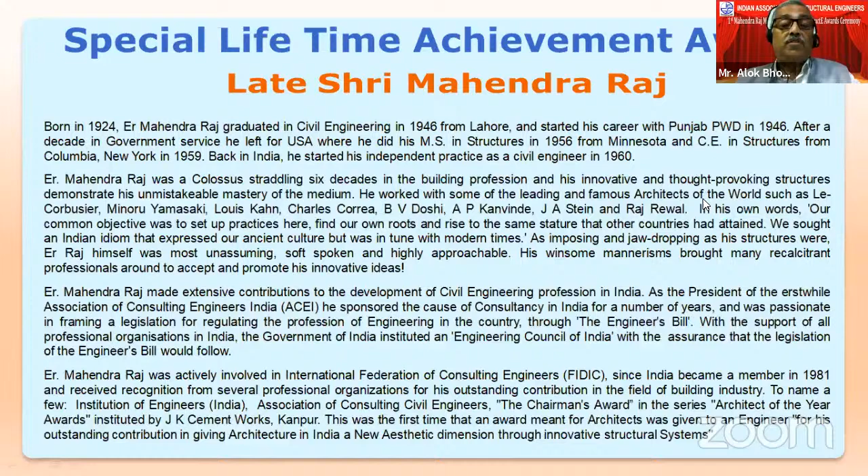May I now request our president to give this citation to late Mr. Mahendra Raj. On behalf of Mr. Mahendra Raj, Mr. Rohit Raj will be accepting it. May I request the president to kindly do the honors.

It is my honor to present this Lifetime Achievement Award to legendary structural engineer Mr. Mahendra Raj. I am sure his rich legacy will continue to inspire the entire structural engineering fraternity. I request Rohit Raj to kindly accept this award.

Thank you, Mr. Mittal. Thank you, Professor Tandon, Mr. Alok Bhowmick, for honoring my father. This was always his - you are absolutely correct in saying this was his child - and all the associations he mentored and grew with as he took a back step professionally, he engaged more and more in all the associations, and his heart was absolutely linked to each and every engineering association that he worked for. We are privileged to be here, for you all to have invited us. I can see my sisters there, my brothers there, my brother-in-laws there. Thank you so much for including us in this ceremony.

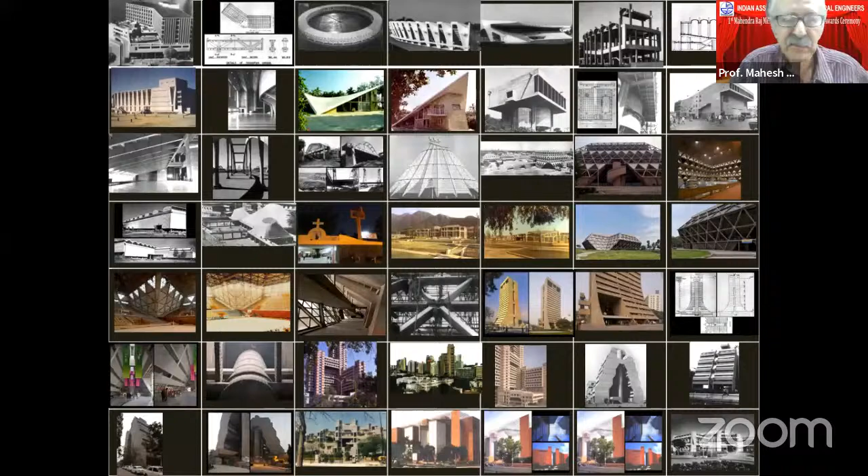About tall buildings, the Council for Tall Buildings and Urban Habitat have a classification based on height: 50 meters means tall, 300 meters means super tall, and 600 meters means mega tall. In 1890, buildings over 10 stories were considered tall, with no further classifications. An Indian code, IS 16700, was published in 2017 on concrete tall buildings, covering a range between 50 to 250 meters.

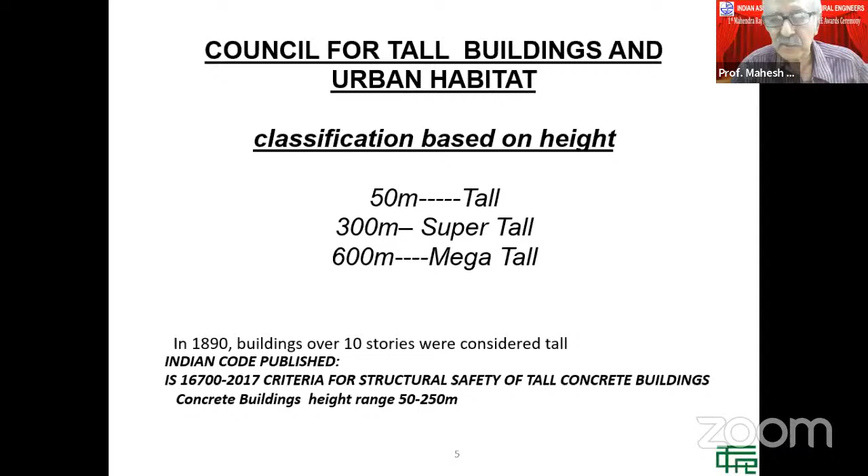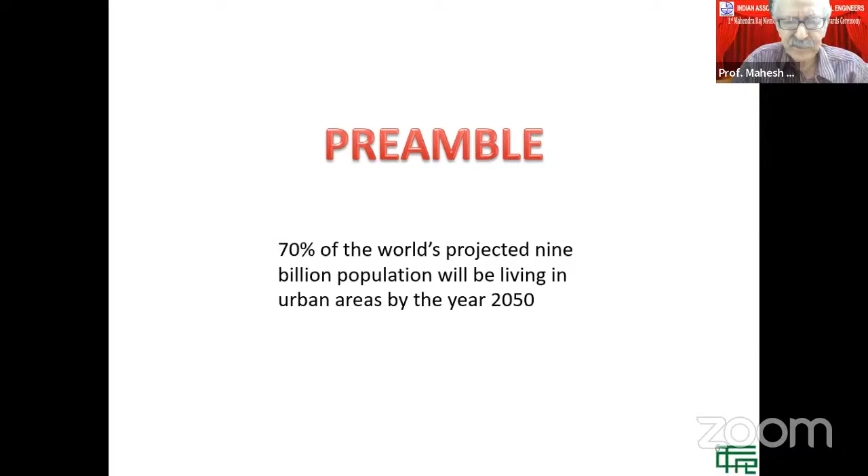70% of the world's projected 9 billion population will be living in urban areas by the year 2050. So we really have no alternative but to go in for tall structures which can house a lot of population. I will, of course, show you what the latest thinking is on the subject, but let's go further.

There are certain milestones in tall buildings which we must recognize. The first was the inventor of the elevator, Elisha Otis, 1850. The architects and structural engineers need to be recognized for the first major tall buildings, that is the Empire State Building, which held the world record for 40 odd years. You have the names of the architects and structural engineers on the left hand side. Then in 1957, the architect Frank Lloyd Wright was the first to think of a mile-high building. The structural engineer who in 1970 developed structural systems suited to very tall buildings was Fazlur Khan, and he was in the company called Skidmore, Owings and Merrill. But we know this company basically because of Fazlur Khan's contributions.

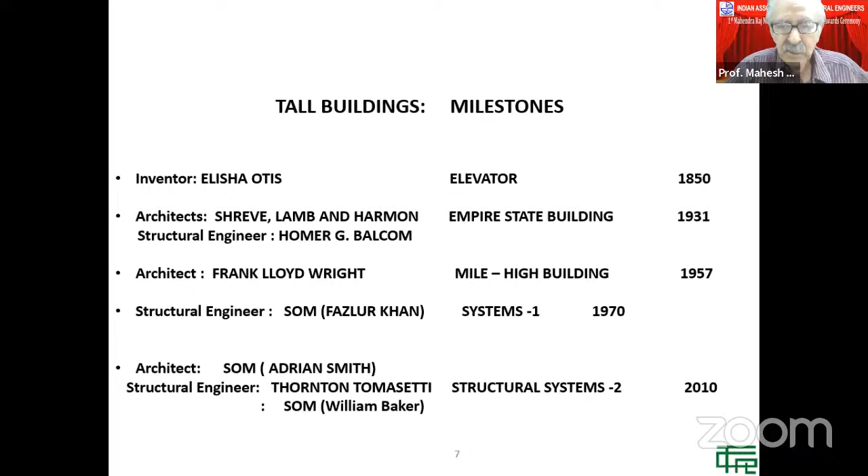Elisha Otis, here he is demonstrating at the New York World's Fair in 1854 that a steam-powered roped elevator with toothed guide rails can go up and down, equipped with a safety device to prevent it from falling, because people always thought in those days that perhaps it's all right to go up and down, but is it safe? So he demonstrated it at the New York World's Fair, which you see here, a picture taken maybe more than 100 years ago. He demonstrated that it is safe, and this was the start of the tall building revolution in the world, because without these types of equipment, you could not build tall buildings.

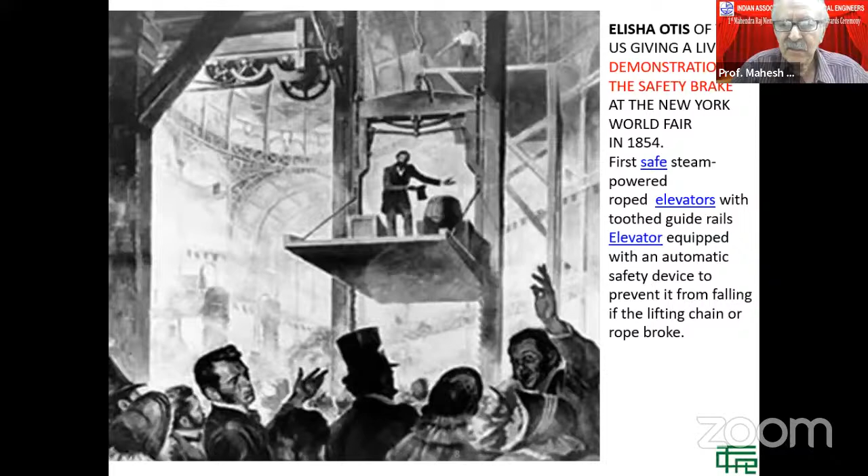The Empire State Building is always a pleasure to talk about, because it had 102 stories and was built in a little over a year. The speed of construction was 4.5 floors per week. This was done in 1930, and I think even now it may be difficult to equal this type of speed of construction.

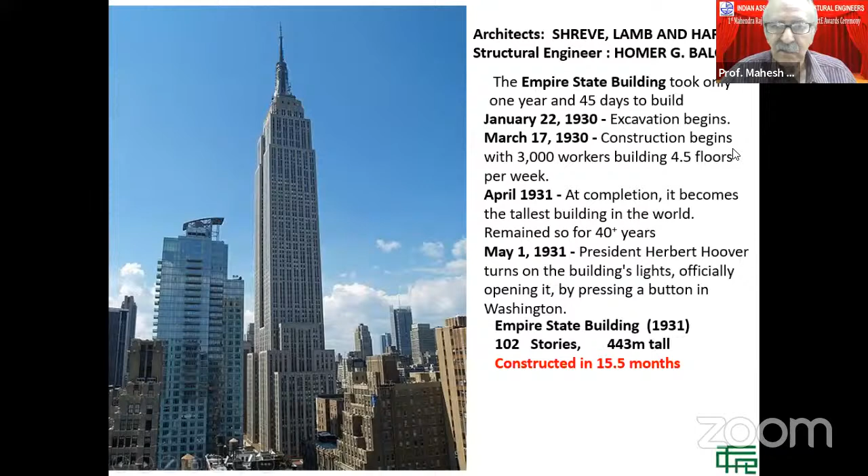Even in those days, in 1931, the president of USA, Herbert Hoover, officially turned on the building's lights, opening it by pressing a button in Washington. So it's not only these days, but even in those days, people had ideas as to how to do it.

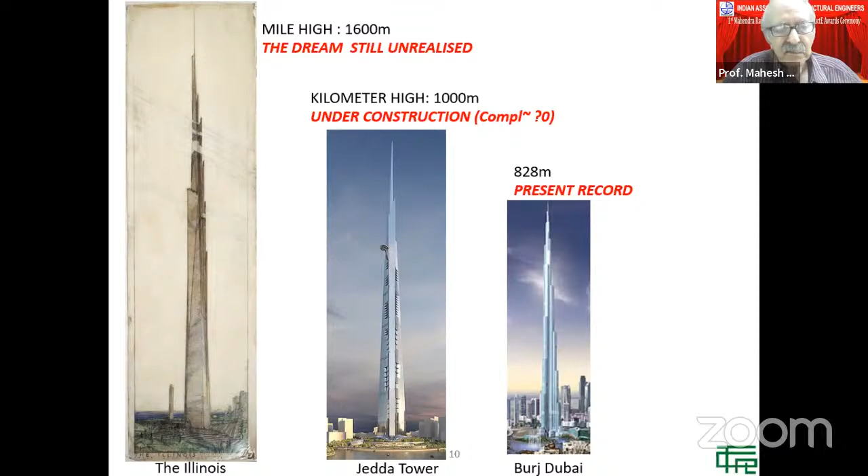One of the things he mentioned, which is truly very touching, he said there is no true understanding of any art without some knowledge of its philosophy. If you read his book, A Testament, published in 1957, you can get all the details of this building and many more of Frank Lloyd Wright. He is considered to be the greatest architect USA has ever produced.

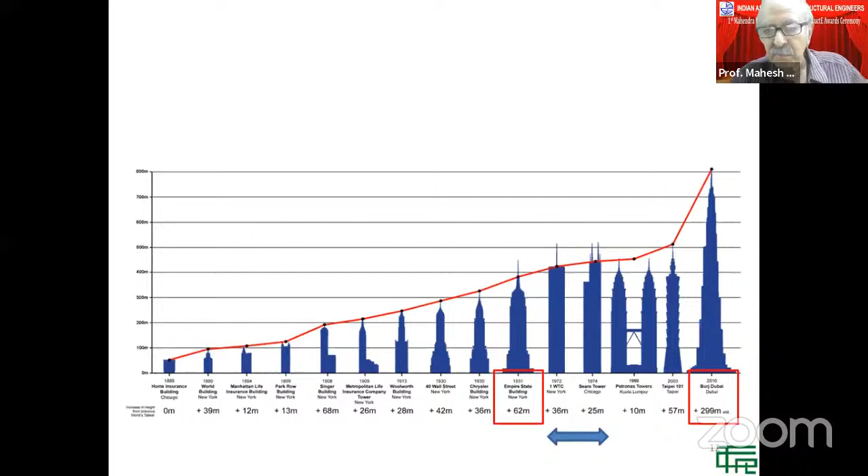As things stand today, you can see on the right-hand side the Burj Dubai, where it has reached. At the bottom, you can see the additional height added each time a building is made: 36 meters, 25 meters, 10 meters, 57 meters, and finally 299 meters from the earlier record, which is actually the Taipei 101. Fascinating building, but you can see the way the height has grown.

Part of the secret of Burj Dubai lies in the fact that it has a concrete base up to a certain height, and then the upper part is made in structural steel frame. This last part was what enabled the building to be so high.

If you look at some of the statistics, it is founded on a 3.7 meter thick raft supported on bored piles 1.5 meters in diameter, extending approximately 50 meters below the base of the raft. So if you see the foundation itself, it gives you an idea of what was involved.

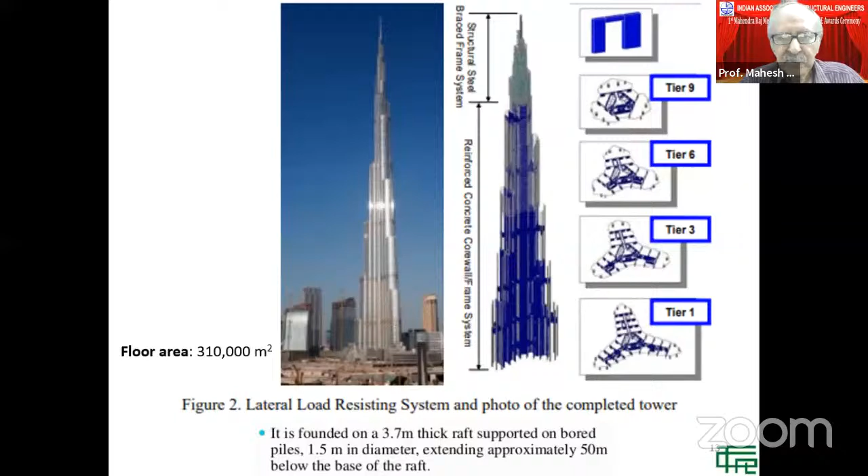This is the Kingdom Tower, supposed to be higher than 1 kilometer. On the left-hand side, you can see the structural framework that was adopted, with long shear walls and cross walls, because the long shear walls would not be stable without them. This is basically the structural concept made for the Kingdom Tower, very similar to the one adopted for the Burj Dubai.

On the right hand side, you can see the wind tunnel test, because all tall buildings, once they reach a certain height, it is better to do wind tunnel testing as shown here. Here you can see a turntable, so although the wind tunnel blows wind only from one direction, you can rotate the building to find out the effects from various directions.

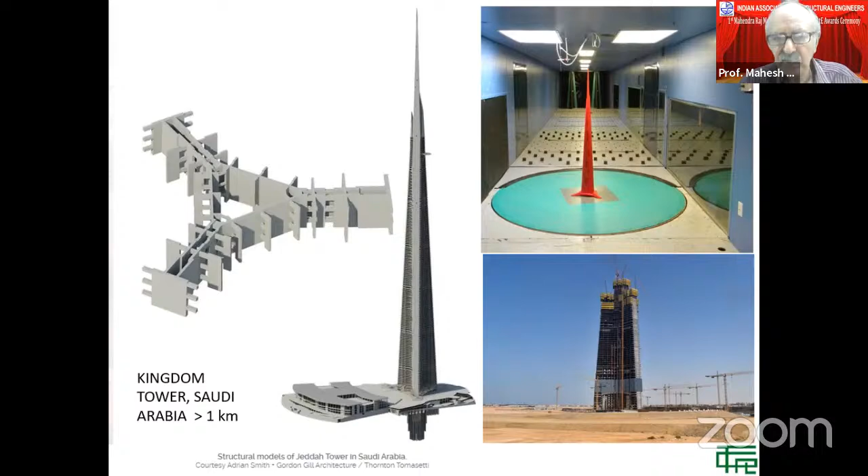The last photograph on this slide shows where it has stopped at the moment. I think it is something like 600 meters, but I'm not sure of the exact height.

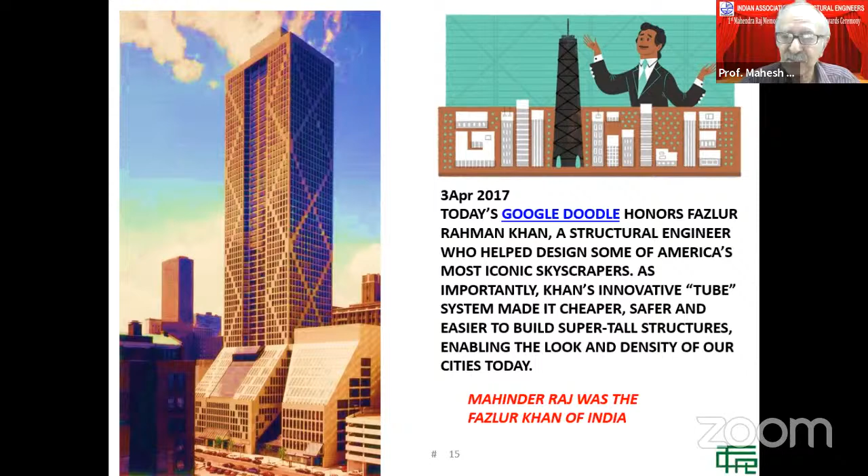Let's talk about Fazlur Khan. On 3rd April 2017, there was a Google Doodle which honors Fazlur Khan, a structural engineer who helped design some of America's most iconic skyscrapers. As importantly, Khan's innovative tube system made it cheaper, safer, and easier to build super tall structures, enabling the look and density of our cities today. I think the closest in our country who comes to Fazlur Khan is Mahendra Raj. He was really the Fazlur Khan of India, but his creations were not limited to just tall buildings, but any kind of structure.

Fazlur Khan ushered in a renaissance in skyscraper construction during the second half of the 20th century by introducing the tube concept of structure. Here you can see the structure is actually outside the building, on the outside facade. Nobody before him had really thought that the structure could be put outside on the facade. Here you can see both concrete and steel applications where the structure is on the outer facade.

Fazlur Khan developed many structural systems for both steel and concrete, and you can see some of them here. This is Skidmore, Owings and Merrill. I think the tradition set by Fazlur Khan is still continuing, and they are still designing the tall buildings of today. Some of the things which we take for granted is the behavior of frames and shear walls. So it is a simple concept but extraordinary.

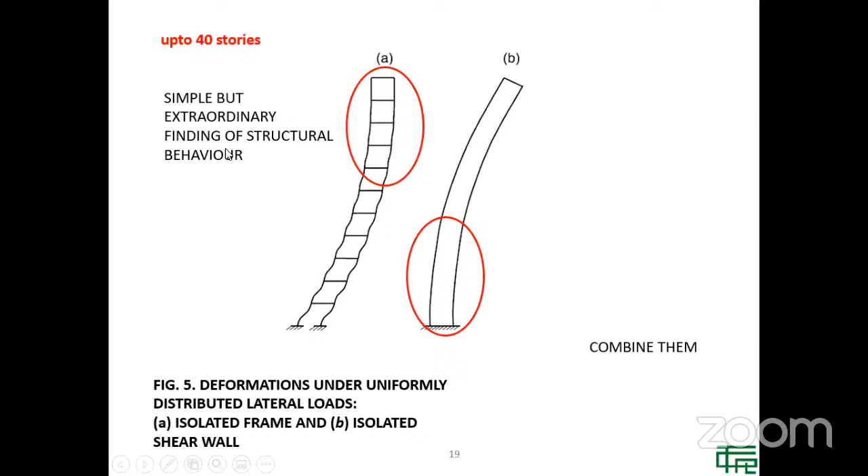I think we have lost Professor Tandon's voice. Maybe his signal is weak. Tandon Saab, we are not able to hear you. I think we may have to wait for a couple of minutes for him to come back. Apologies for this goof up, I think it's not in our hands. Maybe Vikas can call him. Yes, I'm calling you.

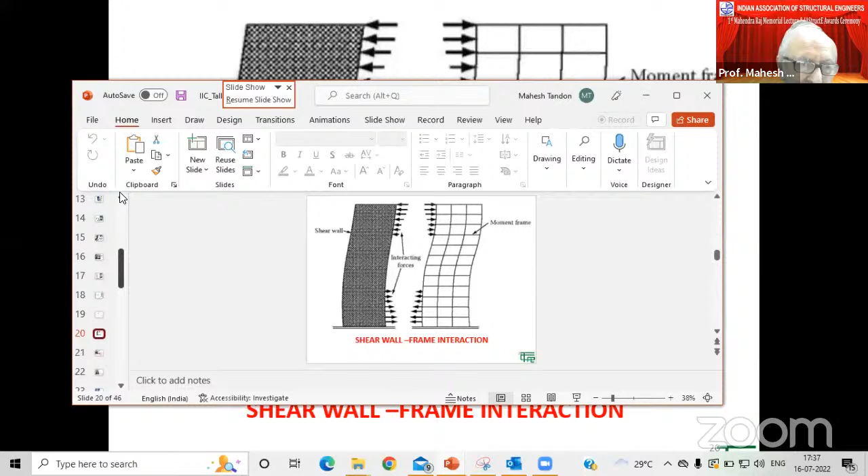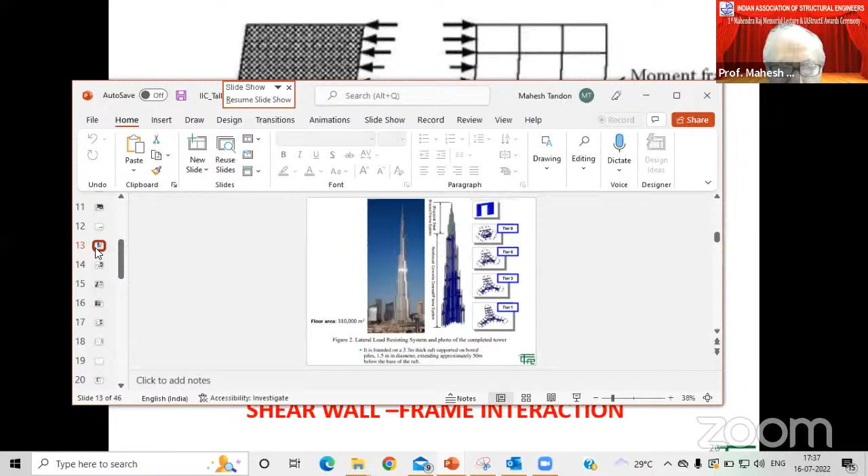Yes, it has come. Just put it in presentation mode. Yeah, one must go to the slide. I don't want to repeat what you have already seen. Sir, he has to go near the 9th or 10th slide, please tell him. Ninth or 10th would be somewhere here. Are you sure? Yes. You can please come to 13th, sir. I think we have gone through this. Shear wall frame interaction, this you have seen? Maybe 15, the one before. Okay, I think you can start from here, maybe a bit of overlap, but you can start from here.

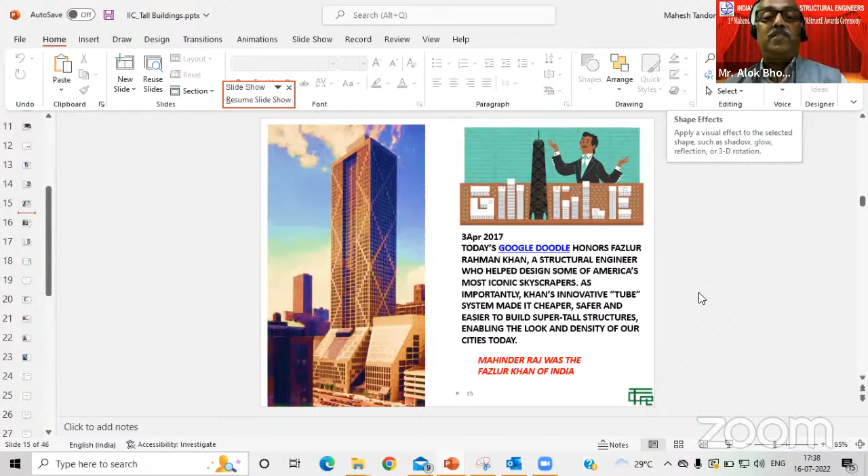This is now not in presentation mode. Oh, we got something else now. Okay, I think we were here.

Fazlur Khan was the first person who thought of putting the structure outside on the facade of the building, as you can see here, instead of putting it inside and cluttering up the whole area with columns.

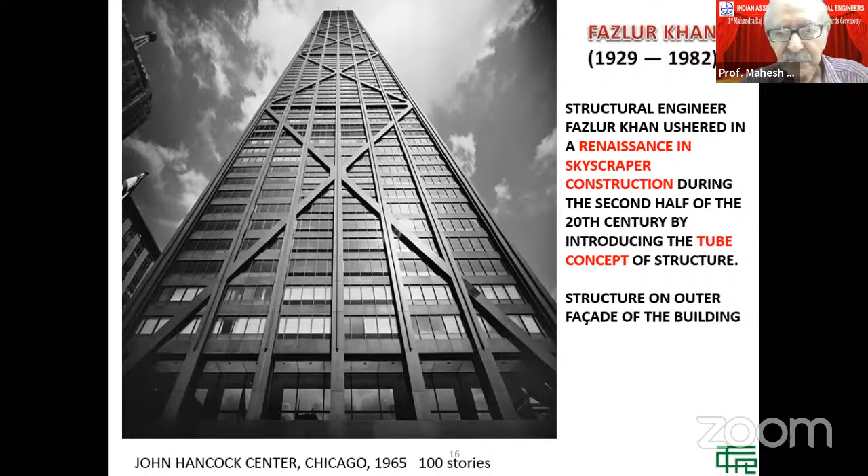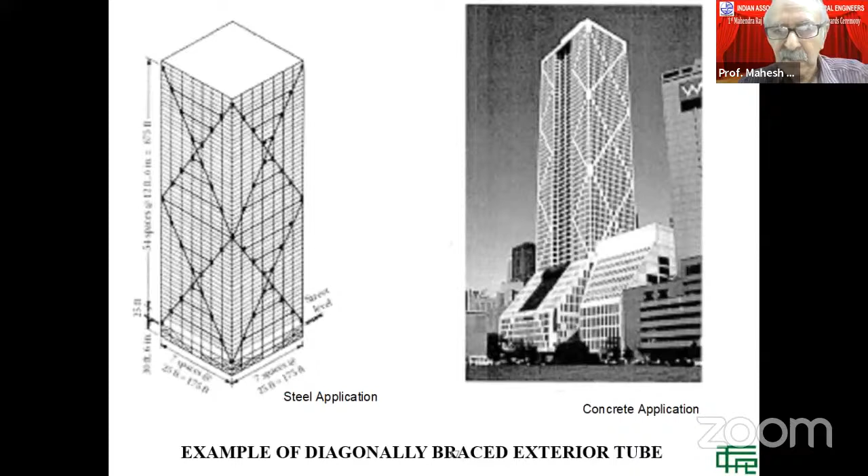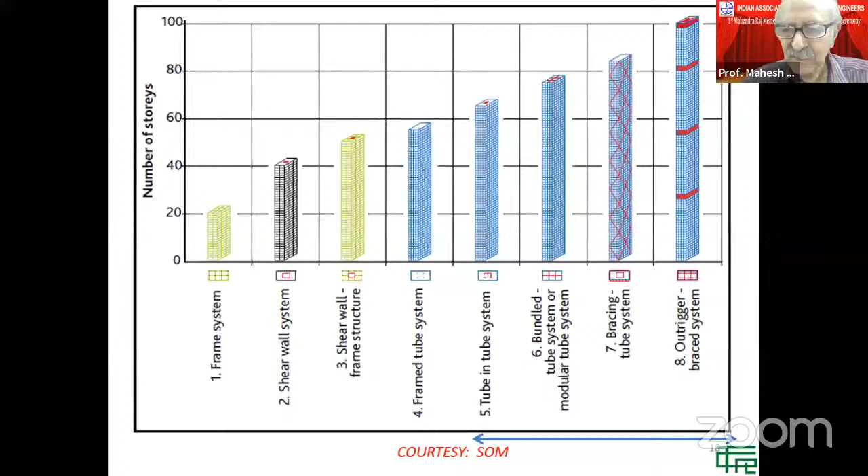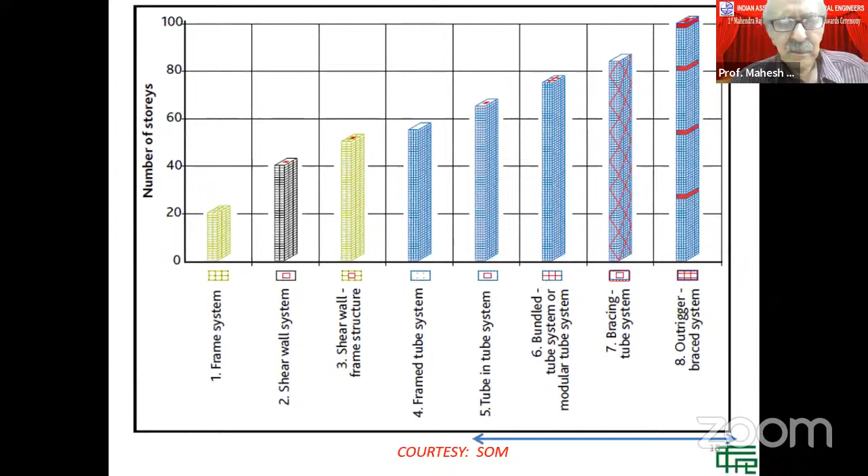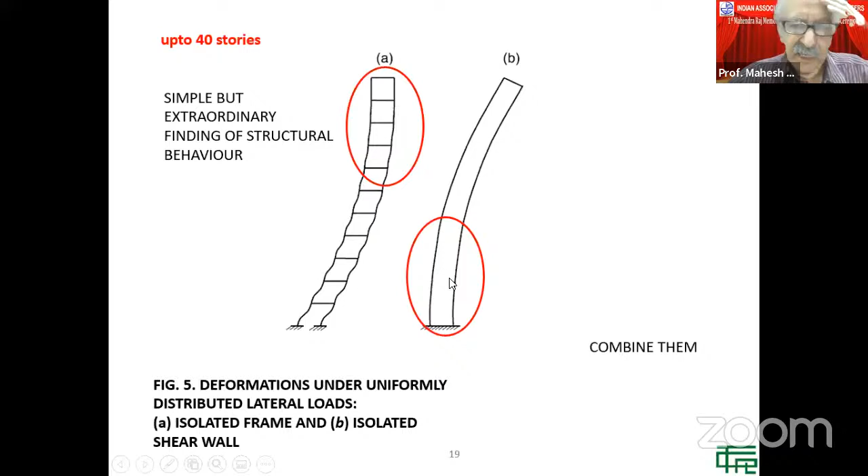If you have a frame by itself, it behaves like what is shown in diagram A. If you have only a shear wall, it behaves as shown in B. So what Fazlur Khan decided to do was join the two together, so that at the top it would be a coming together of the two types of structure - shear wall and frame - and at the bottom again it would come together. This is what it looked like, his conception.

And today we take it for granted that everybody knows about shear wall frame interaction, but let us pay homage to the person who first thought of it.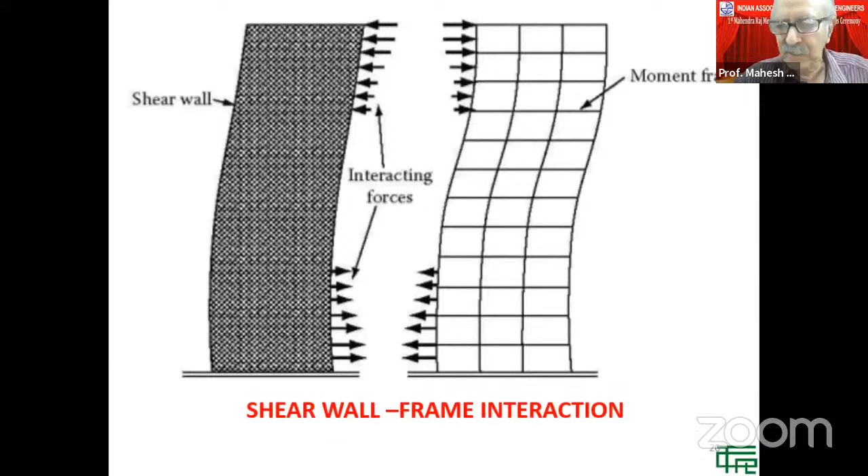One of his earliest buildings in concrete was where he put an 8-meter deep transfer beam right at the bottom. But this is not the only thing that works as a structure. He has got this outer framework which acts as a structure on the outer periphery, and he also has a tube in the center, or rather the core of the building, that also. So there is a core which is the shear wall, as well as the frame which is on the outer surface, and they work together.

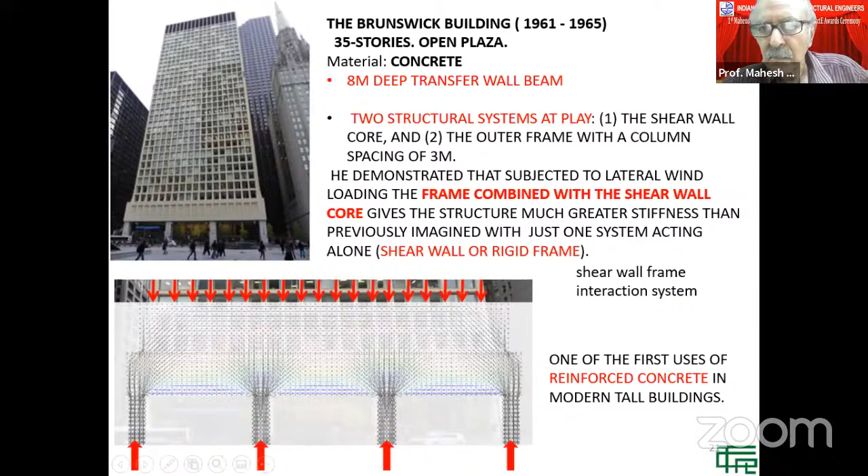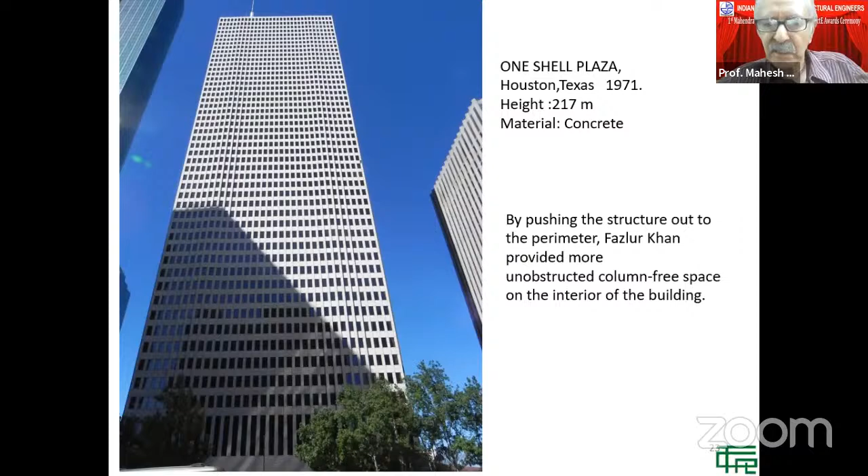Here you can see another building, one of his earlier buildings in concrete, 217 meters high. And what was the great thing about putting the structure outside?

Can you see the slide? Hello? Yes, we can, we can, Professor Tandon. Okay, and you can hear me?

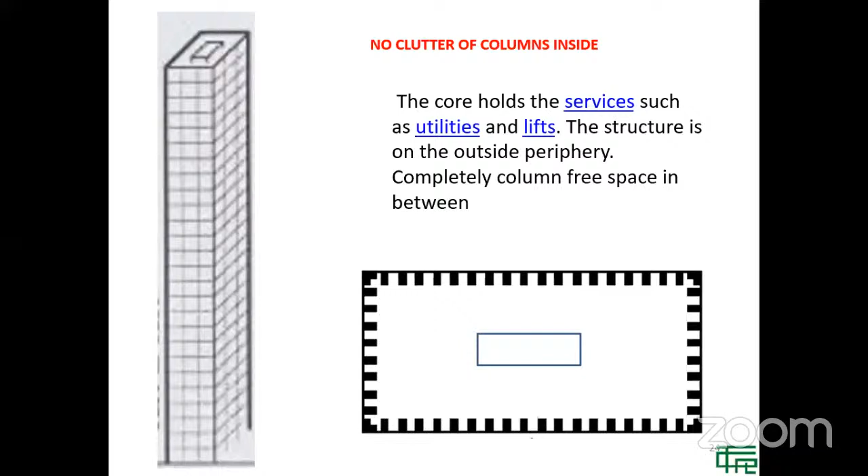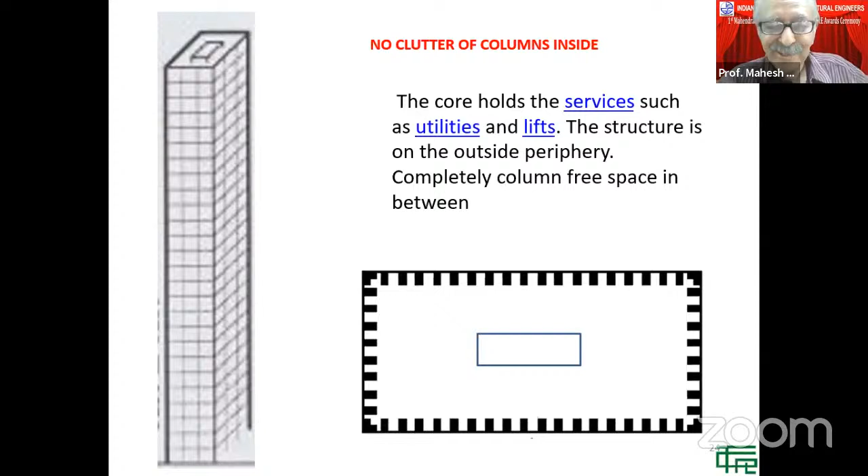Yes, of course. Okay, so here you can see just a rectangular building wherein the central part there is the utilities which go up, and the lifts. That space is occupied by these items, but there is no column anywhere. Columns, or rather the whole structure, is located only on the outer periphery of the building. So you could have column-free space, which the architects are so fond of - they keep talking about how they don't like columns at all. So I think this was made for architects, basically.

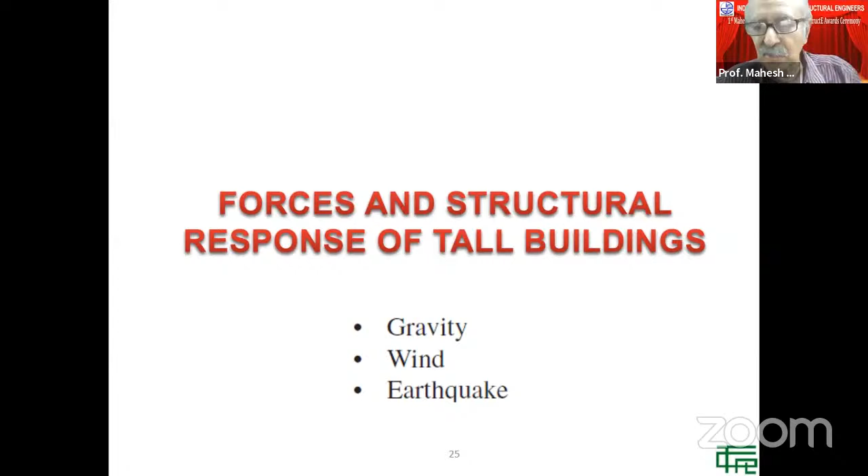Now, just talking about tall buildings, we have to talk about not only the gravity load, but wind and earthquake. So we'll discuss a little bit about that.

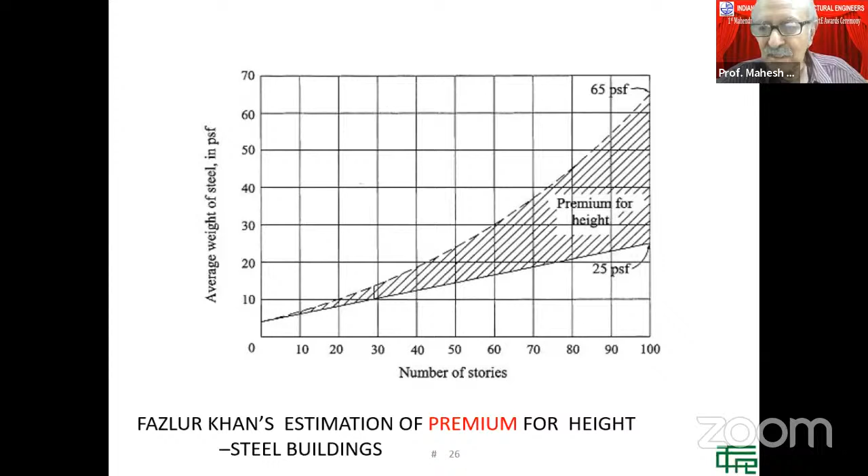For tall buildings, you can have 25 pounds per square feet if there was no wind or earthquake, and you can also have 65 pounds per square feet, which is 2.5 times that, if you have wind and earthquake also to be taken into account. So we must understand why the structures of tall buildings are always more expensive - because you are paying a premium for height.

The main issues of tall buildings are: one is the structural strength and stiffness for lateral forces, and evacuation - how do people evacuate from the building? I think after the World Trade Center towers, everybody is worried about evacuation.

There is also the question of vertical transportation, the origin of which was done by Mr. Otis, that you have lifts going up and down. Vertical distribution of utilities is another thing - how do you send water, how do you do drainage, and so many other things.

Vertical building movement is the other problem. If you have such a tall building and such a big height, the building actually shortens because of elastic deformations.

Another problem is during construction, setting out and verticality. The building actually sways even during construction, and how to keep the setting out and the verticality in position is another issue which tall buildings have.

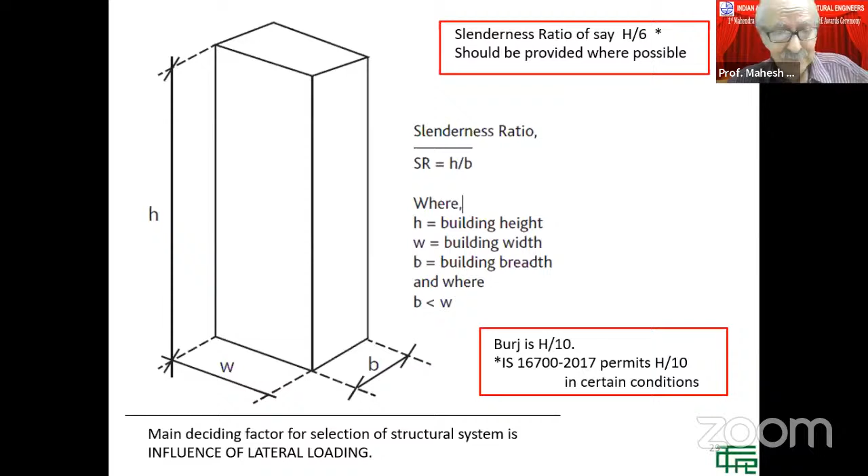The deflection at the top, h by 500, that is the limit. Interstory drift for wind and earthquake is different. For wind it is h by 500, and for earthquake it is h by 250. This is the drift between two consecutive floors. How to find that out is also there, because all these play an important role in the comfort level of the people staying there.

So you can see peak combined acceleration is the other major issue. For residential buildings, it is more stringent as compared to office buildings.

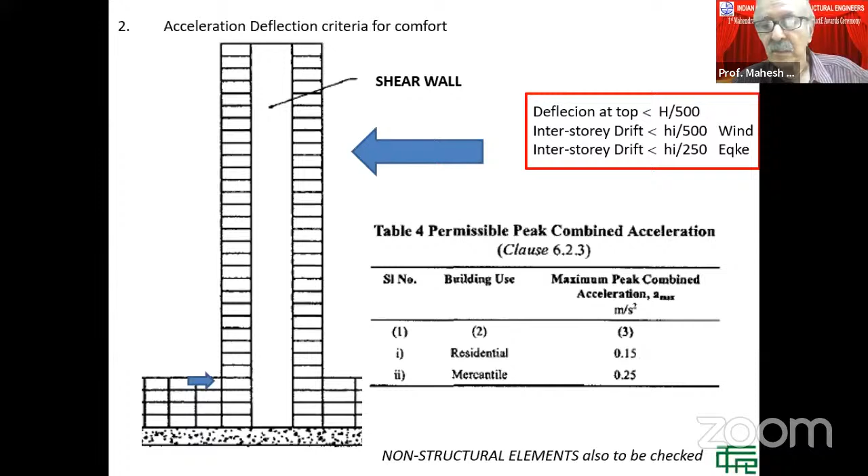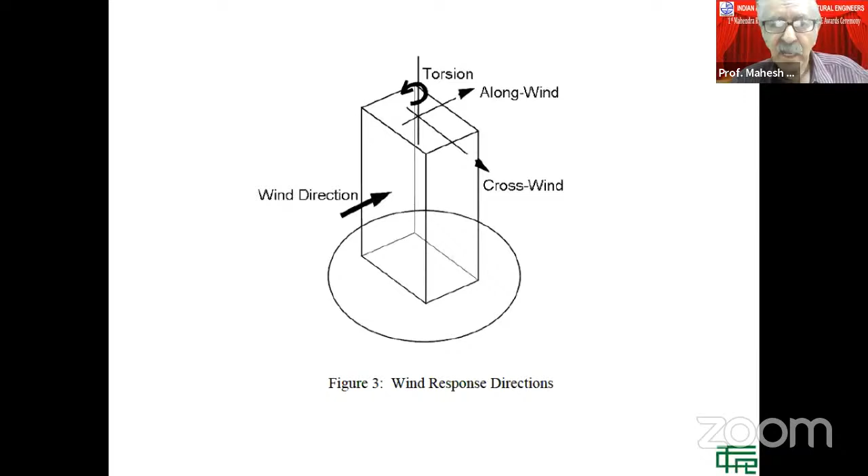Now, if you see, the wind comes from one direction, but there can be three effects on the building itself, the response. You can have an along-wind response, you can have a crosswind, and you can have a torsion. So all these have to be taken into account.

Another issue is the terrain category. Like, for example, if you are in urban areas, you already have a number of buildings, so there the wind action is different. This Vg is the gradient height above which the wind becomes more or less constant speed. As you keep going down, the wind speed also comes down depending on the terrain category.

So that is why you have to model, perhaps in the wind tunnel, which is the best solution till today, to find out how the behavior is, because these buildings which are already existing, they also have to be modeled to find out the effect of the new building which you are going to construct.

The other thing is about interference effects. If you have two buildings which are more or less similar, the effect can be quite drastic, one on the other. So that also is something the wind tunnel will tell you, rather than there are other ways of finding out, like CFD, computational fluid dynamics. People are doing all that in computers, but at the moment, I think the most reliable thing is to go for a wind tunnel.

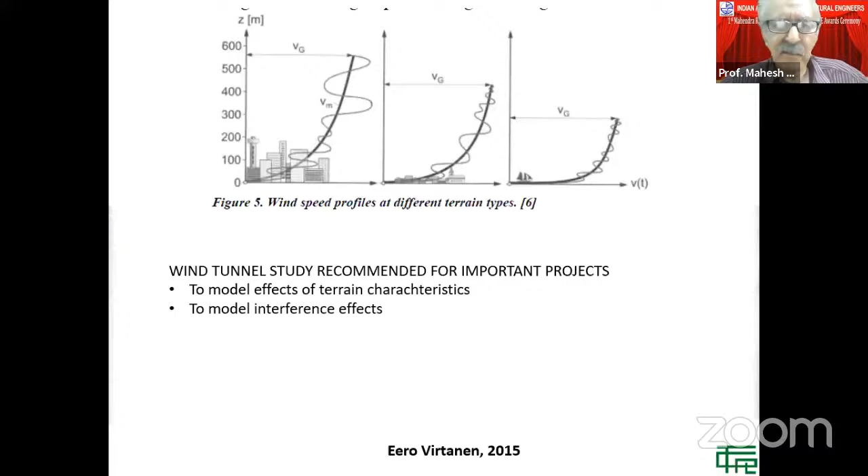Here's a wind tunnel, the National Wind Tunnel Facility at IIT Kanpur, which we had the pleasure and privilege to design for them. You can see that it is a closed circuit wind tunnel, and you can also see the turntable, so that you can rotate the building itself, because the wind will come only from one direction in the wind tunnel. So you can find out the effects.

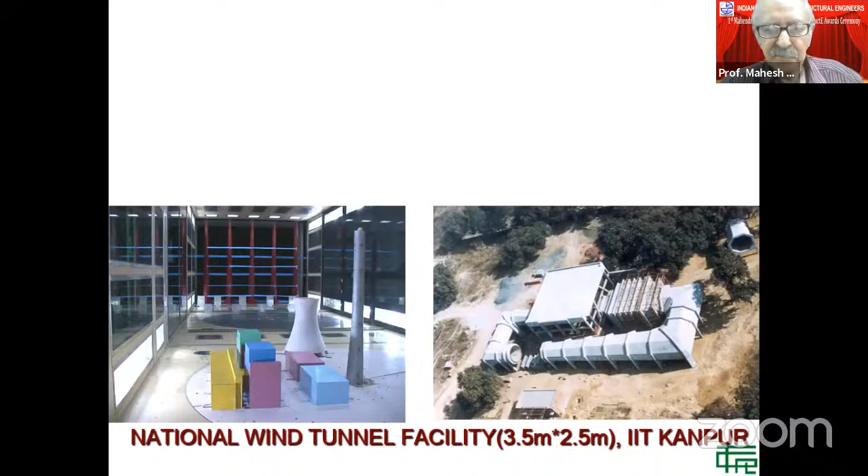Now, talking about earthquakes, what is dangerous is the resonance of the building and whatever is below, the soil or rock. If you have hard soil or rock, the dominant period of the earth is about 0.5 seconds. But if you have a soft sediment like we normally have, then it is 2.5 seconds. So if you don't want the building to resonate with the ground, you should stay away from these frequencies.

As a matter of fact, people often think that tall buildings are more dangerous than short buildings in an earthquake. That is not correct. If you design it properly, the tall buildings are actually safer.

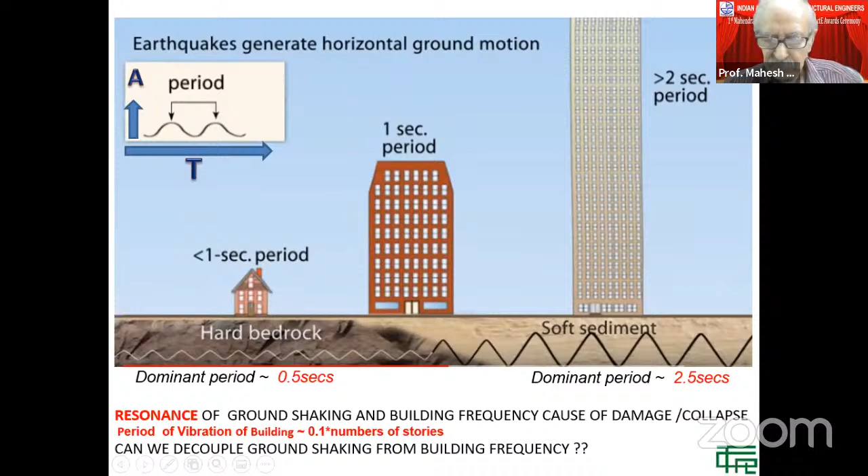Okay, this doesn't work.

Of course, there are other ways in which the effects can be reduced, either by base isolation or by...

Just one second. Anyway...

If you have a base isolated building, that is the other way in which you can reduce these effects which are due to wind and earthquake. I wish I could show you a building which is shaking, but I think we'll have to miss that.

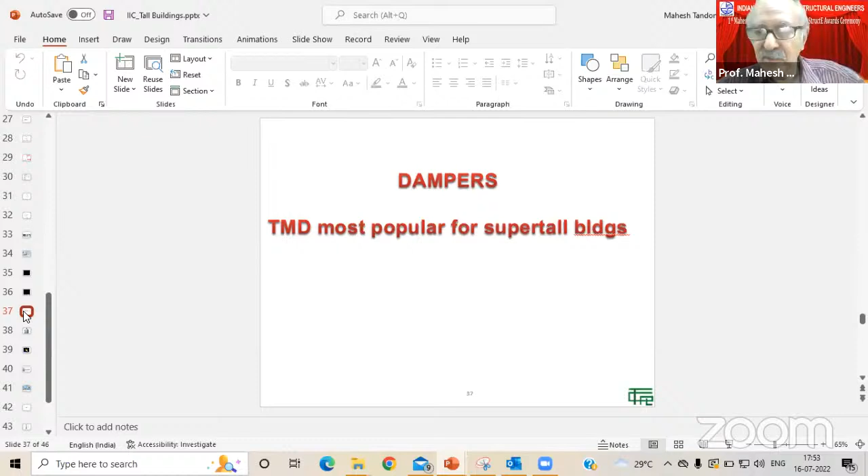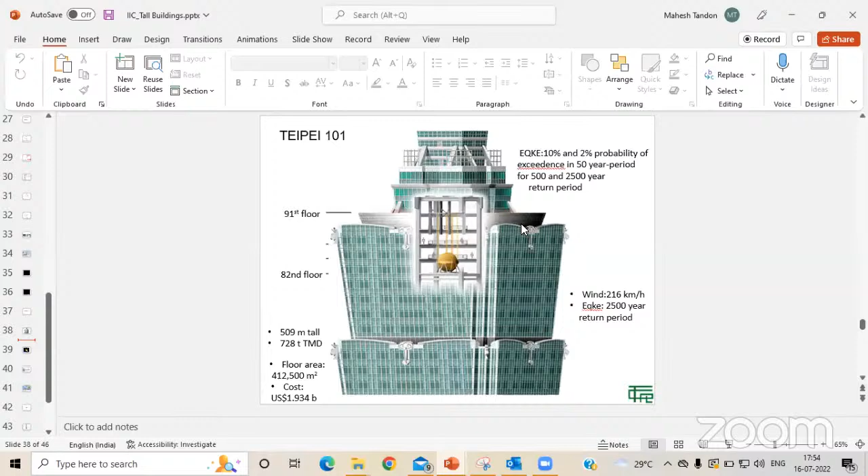And there's another thing which is dampers. Dampers means that if you see this Taipei 101, which held the world record before Burj Dubai, there is this big yellow 700-ton steel ball at the top. Tanan, I would like to go back to the slideshow. Thank you.

So this steel ball that you see, it is hung from the top, and it moves in the opposite direction to which the building is moving. So it is actually damping the vibrations which may be due to earthquake or wind. And it has already, as you can see here, withstood the design wind speed, and the earthquake, which you can see on the right hand side.

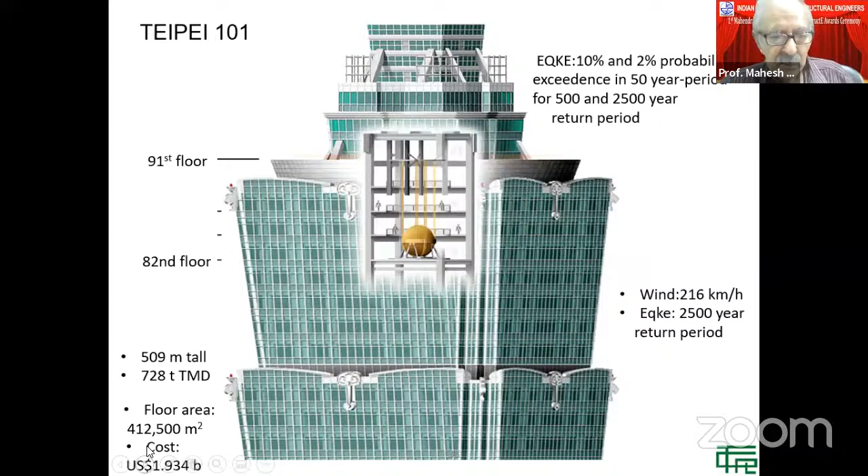So let us go and see whether this thing works. The blue line is the building, and this yellow ball that you see is the steel ball of 700 tons, which is moving opposite to the direction in which the building is vibrating. So this is how we are able to reduce the effects of both earthquake and wind due to this.

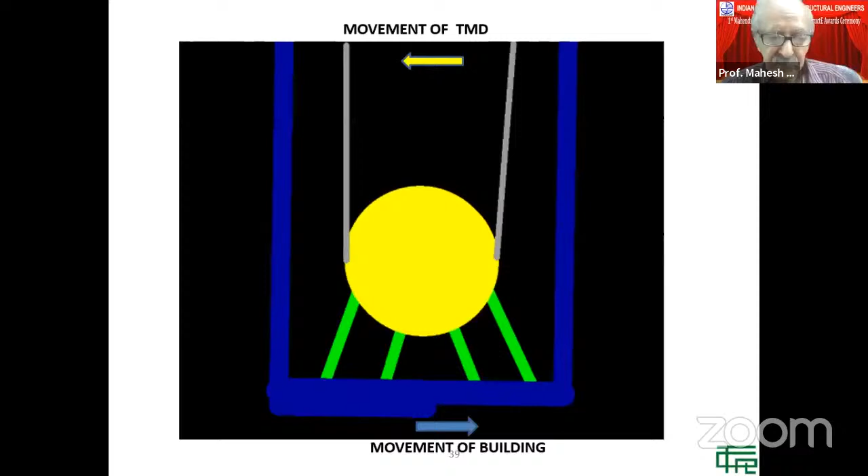Now I wanted to talk about the Kingdom Tower, which is supposed to be greater than 1 kilometer high. At least it was supposed to be. So what are the main issues?

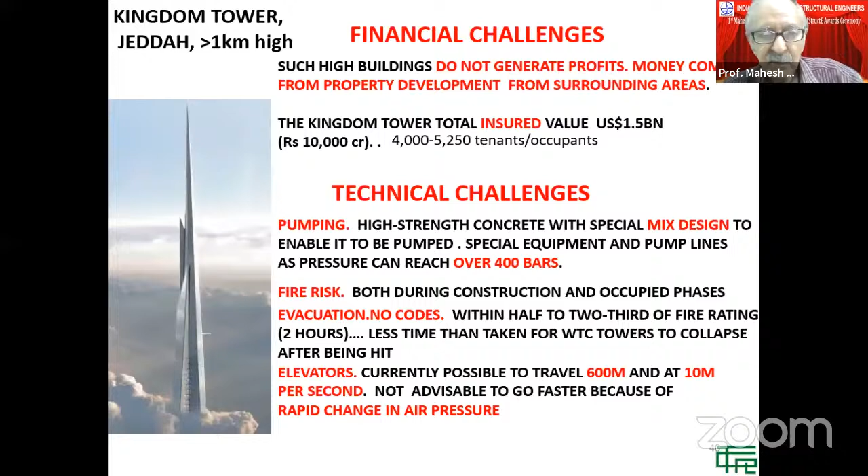Now, coming towards the end of this, there is an American architect, Eugene Tsui, Chinese American. He thought of the Ultima Tower, which is 2 miles high. And if you can see the shape of the building, and compare it with Burj Dubai here, you can imagine how tall this is. And according to this architect, you can house the whole San Francisco city in this tower. Of course, the cost will be about 3 billion dollars. But this is the new thinking that is coming, that you can have taller and taller and taller buildings.

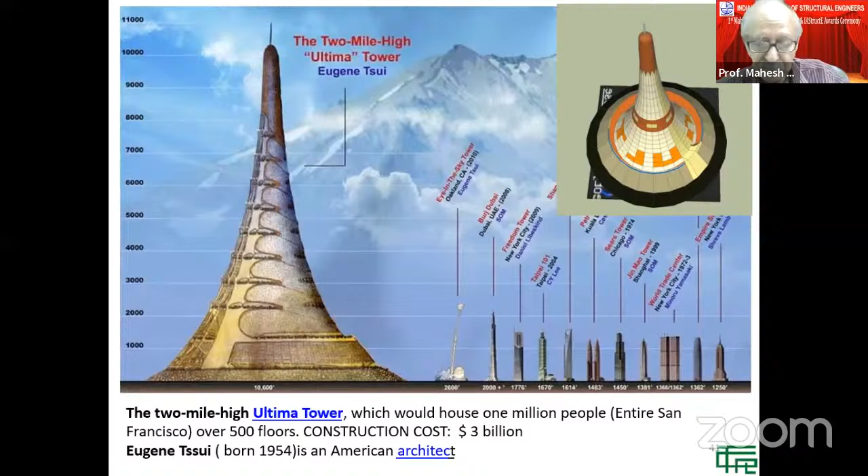Okay, thank you very much for your kind attention.

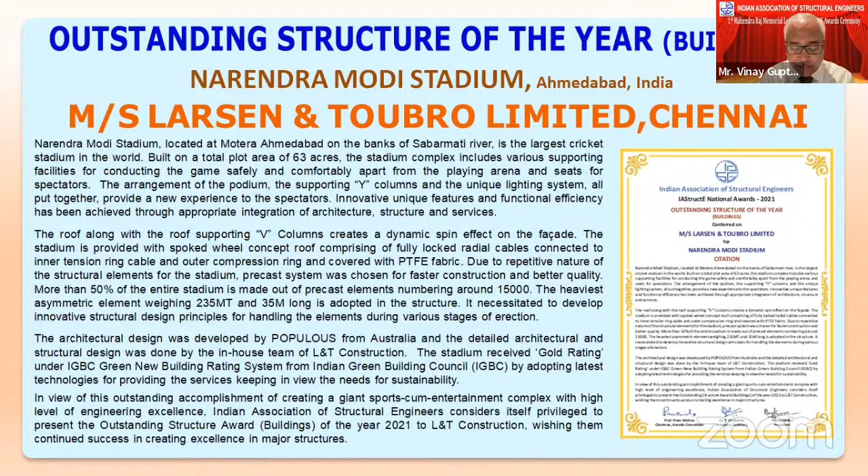So in view of this outstanding accomplishment of creating a giant sport cum entertainment complex with a high level of engineering excellence, the Indian Association of Structural Engineers considers itself privileged to present the Outstanding Structure Award in the Buildings category of the year 2021 to L&T Construction, wishing them continued success in creating excellence in major structures.

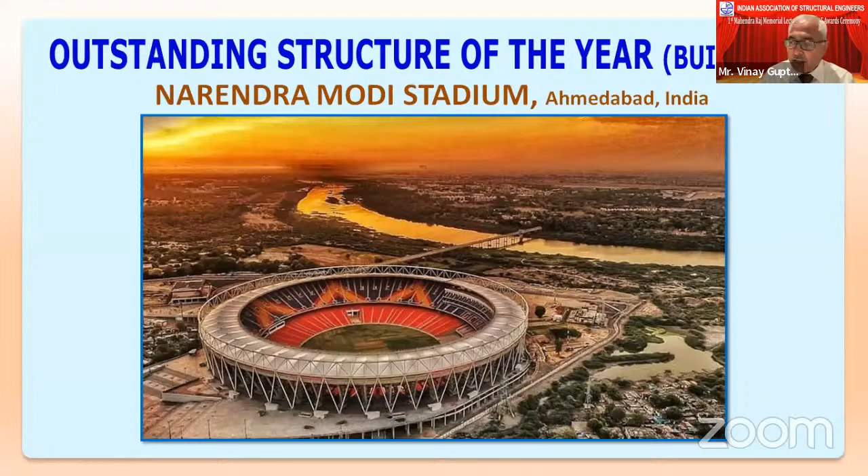So I think with these words, we have all understood how excellent the structure is and what world record it has created. May I request Mr. Eswaran to take 2-3 minutes and say something about how you feel about this award, this association, IAStructE, and anyone who has immensely contributed towards the success of this, to help you out, please.

Yes, sir. Thank you, sir. I want to confirm whether I am audible and whether you are able to see me. Yes, sir, you are audible, loud and clear. Please go ahead. Thank you, sir.

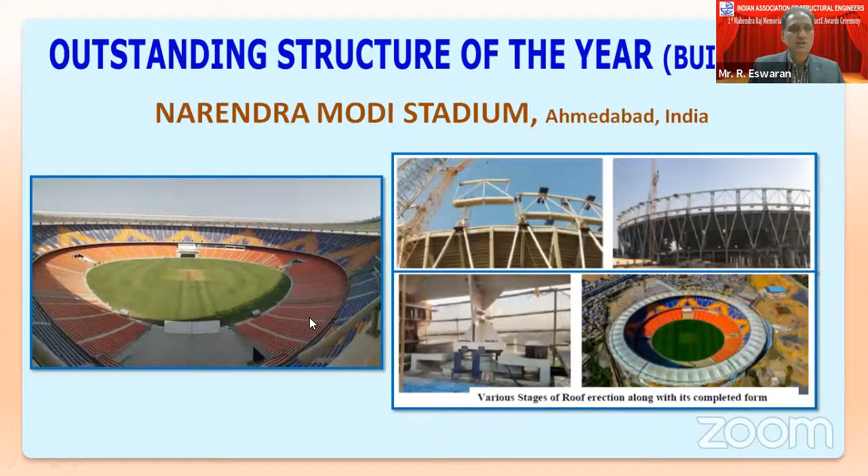For the safety aspect, we use precast because of controlled concrete. For sustainability, we also look for getting green ratings wherever possible. For modernization of technology, we are using BIM technology and other technologies for erection, etc.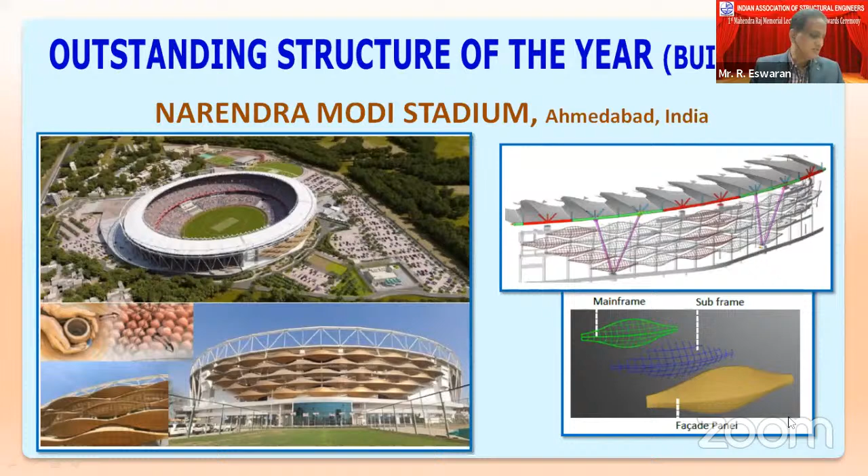This stadium has won other awards. We got the ACCE, Association of Civil Engineers, Consulting Civil Engineers Award for excellent use of steel tubes. We also got an outstanding award from ACI, and we have been nominated by FIB for the outstanding structure award.

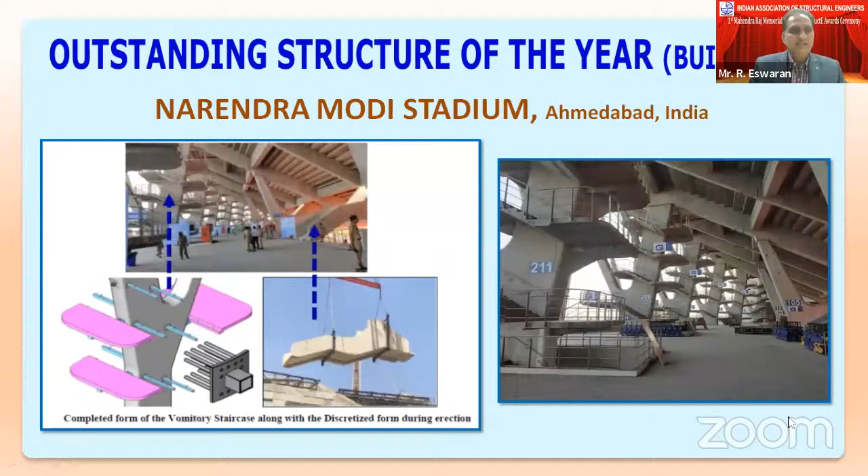With these achievements, I'd like to thank the panel members and jury members for selecting this. It gives us a great opportunity to work further and enrich ourselves further in this field. Thank you very much, once again, to all of you.

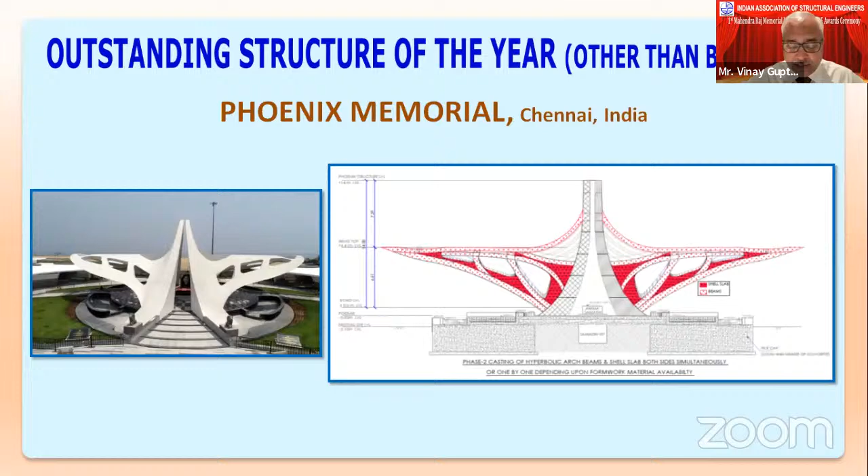So to honor this outstanding accomplishment, the Indian Association of Structural Engineers considers themselves privileged to present the Outstanding Structure of the Year, Other Than Buildings, Award to Professor S. Arul Jayachandran, Department of Civil Engineering, IIT Madras, for the excellent structural design, and wishing him continued success in creating excellence in major structures.

Now let me request Mr. Manoj Mittal, our president, to first formally present this award before I request Professor Jayachandran to say a few words about how he feels about it. You are a professor yourself, but he has immensely contributed towards this award. But before that, the award must be given to you. So Mr. Manoj Mittal, please.

Thank you, Vinay. Congratulations, Professor S. Arul Jayachandran, for winning the Outstanding Structures Award in the non-building category for Phoenix Memorial, Marina Beach, Chennai. I am honored to present this award to you. Thank you, sir. Thank you very much, sir.

So sir, a few words from you, about 2-3 minutes. So am I audible, sir?

Yes, absolutely. So first of all, I thank the Indian Association of Structural Engineers, the members of the executive committee, and especially the juries of the award. First of all, I pay my tributes to Sri Mahendra ji, whose vision has made all of us come together today. Professor Prem Krishna and Professor Tandon were big inspirations for me, even as a student. I haven't spoken to Professor Prem Krishna, but I walked with him about half a kilometer along with Professor Lakshmanan.

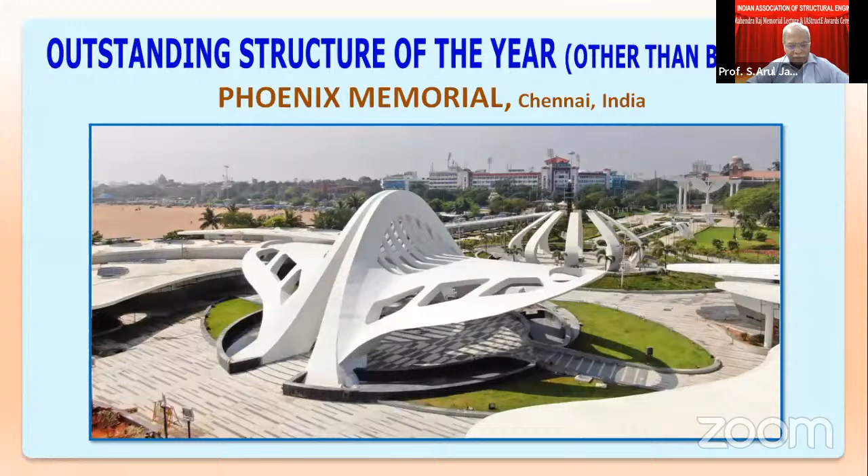I was molded in two workshops - one is Structural Engineering Research Center, Chennai, and the other is IIT Madras. I'm grateful to both institutions. One morning, the PWD chief engineer from Tamil Nadu walked into my room and asked me whether I could design this iconic Phoenix Memorial bird structure, and my answer was a spontaneous yes, and I enjoyed the journey thoroughly. Probably I want to imagine myself as Sir Alex Ferguson, the famous coach of the Manchester United football team.

I always want to get the best out of people, and my team players were Murali Architects, Krishnamurti Associates, the contractors Marbag Infra Private Limited, who gave design support for us, and they are in the front line. In the middle, RMD Quick Formwork and ICOMAT, the midfielders, and Mr. Ayiratharasu Rajasekharan, Superintending Engineer of PWD, as the deep defense. I'm sharing this award with all my team players.

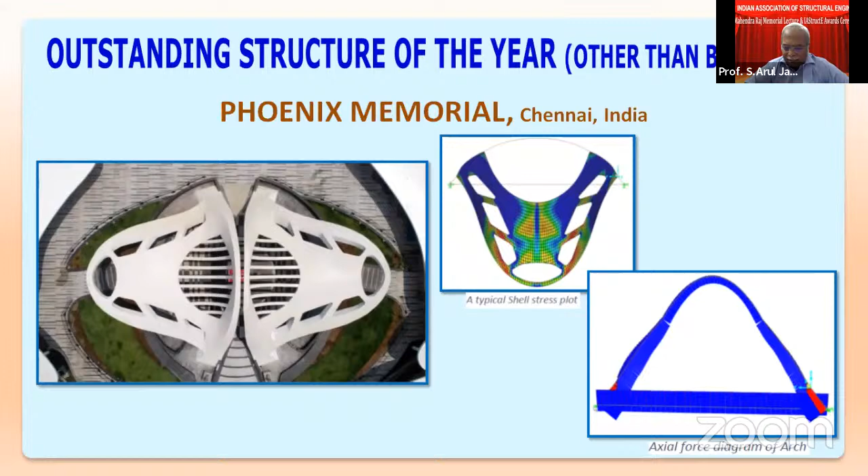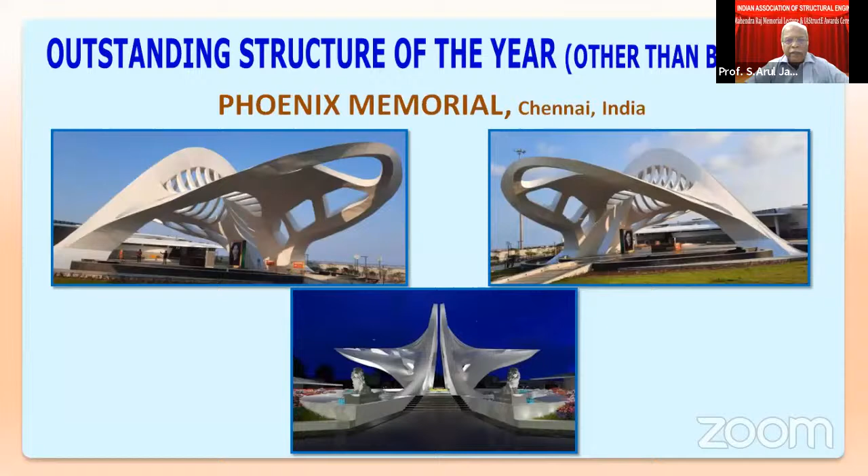I thank the Indian Association for Structural Engineers once more. My structural journey will be in high speed after this award. And someday I will share the technical details of this structure. I seek blessings from all the doyens of structural engineers in India, and I will continue my teaching and research to the profession for the rest of my life. Thank you very much, sir.

Thank you very much for your remarks, Professor Arul Jayachandran. It's very nice to see you after quite a few years. Yes, and also very nice to see you get this award. Thank you for all the devotion that you have had to structural engineering. It's a very befitting award to you. I'm sure you'll design many more. Thank you, sir.

The next award is for the Outstanding Structural Engineer 2021, and I have the pleasure to announce that the award goes to the redoubtable Mr. V.N. Heggade.

May I request Dr. Shilpa Pal to kindly read the citation for Mr. Heggade. Dr. Shilpa Pal is a member of the Governing Council of the IAStructE and is a very dynamic young academic. Shilpa, please. Thank you, sir.

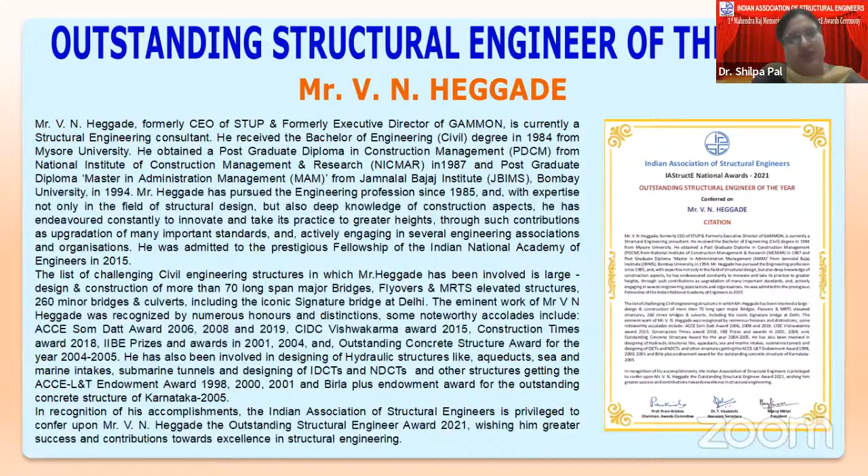With this, I request the President, IAStructE, to please confer the award to him. Mr. Heggade and Mr. Mittal, please.

Congratulations, Mr. Heggade, for being named winner of the Outstanding Structural Engineers Award. I am pleased to present you this award. Continue doing good work. Please accept this award. Thank you.

Mittal, and all the others who found me fit to be receiving these awards in the first place. All of you know that normally I'm not at a loss of words, but it's my experience that receiving awards and giving an award acceptance speech, I find, is always the most difficult task, because sometimes we have to talk about ourselves, and that becomes difficult.

But I have to say today that I consider myself very lucky and immensely honored, because I'm receiving this award on the occasion of what feels like a divine moment, where Mahendra Rajji was given the Lifetime Achievement Award. I also got to hear about many of Mahendra Rajji's achievements during this time.

And I'm motivated, I can say once again, and it puts an additional onus on me now to come out with works that deserve more and more awards. I am encouraged and motivated, and you will see more attempts and efforts being put in by me going forward in the future. I once again thank you all, especially the jury, for finding me deserving of this award. Thank you very much.

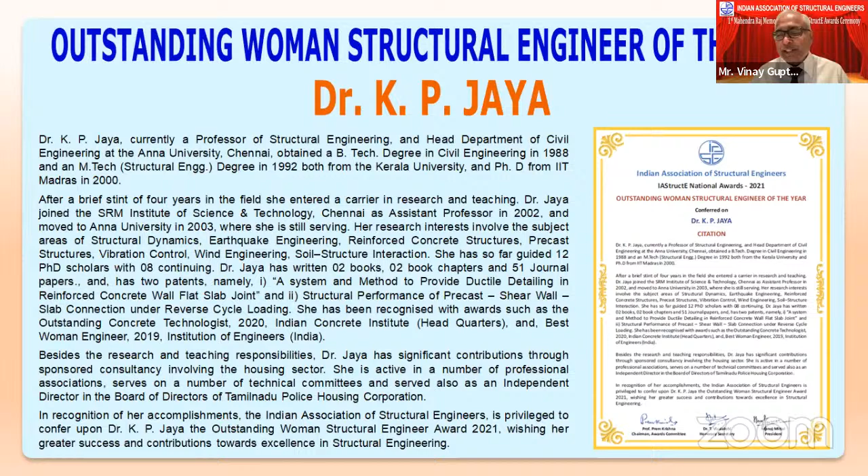Dr. K.P. Jaya, I'm really very happy to present you this Outstanding Women Structural Engineering Engineers Award, and I'm highly impressed with your contribution to the structural engineering profession. Kindly accept this award.

Am I audible? Yes, Dr. Jaya, now you're audible. Good evening to all. Good evening. Actually, it's my pleasure to be part of this great event.

Early morning also somebody called me and told me to be part of this, so actually it's my pleasure. I'm really honored to be the recipient of this award. This award has awakened more responsibility on me to continue to spread and provide more of my service to the field of structural engineering.

I would also like to extend my gratitude to all the panel members. Sir Prem Krishna, I'm very much thankful to you and your team for awarding this to me. I also thank my parent university, Anna University, who has given me more freedom, more opportunities to spread my knowledge and extend my service to the field of structural engineering.

And finally, I'm dedicating this award to my family. Without their support, I cannot have achieved anything in my life. Especially both my daughters are in the field of civil engineering, that is the extent which I can give unto the society. Thank you very much, thanks a lot.

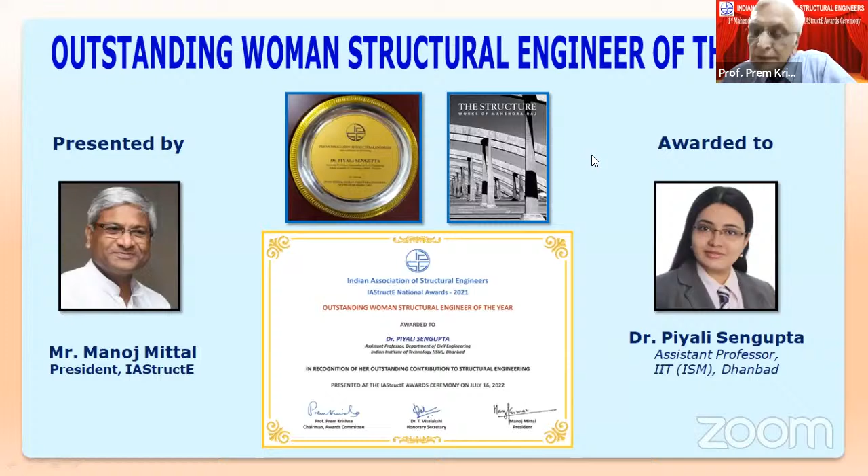The next award in this category of Outstanding Women Structural Engineer is to Ms. Papia Mandal. I'll request Mr. Vinay Gupta to kindly read the citation for Ms. Mandal as well. Sure, sure.

Ms. Papia Mandal is working for Engineers India Limited as Deputy General Manager, Structural, Gurugram. She's a BE in Civil Engineering from Jadavpur University, Kolkata, and M.Tech in Structural Engineering from IIT Delhi. In an endeavor to continue her learning streak, she has further pursued a long duration program on general management and leadership from IIM Calcutta.

She has experience of 24 years, having been engaged in a series of domain engineering activities with a lead role in several challenging assignments. Following initial grooming, she was assigned a lead role in the LLDPE/HDPE unit of the integrated complex at Panipat, executed by EIL on EPC basis.

She was entrusted with very large gas processing facilities in UAE and also a major responsibility in a project by BPCL Kochi for the expansion of its refinery, wherein Ms. Mandal was in charge of the most complicated hydro processing block comprising two major process units, the VGO hydro treatment and diesel hydro treatment units.

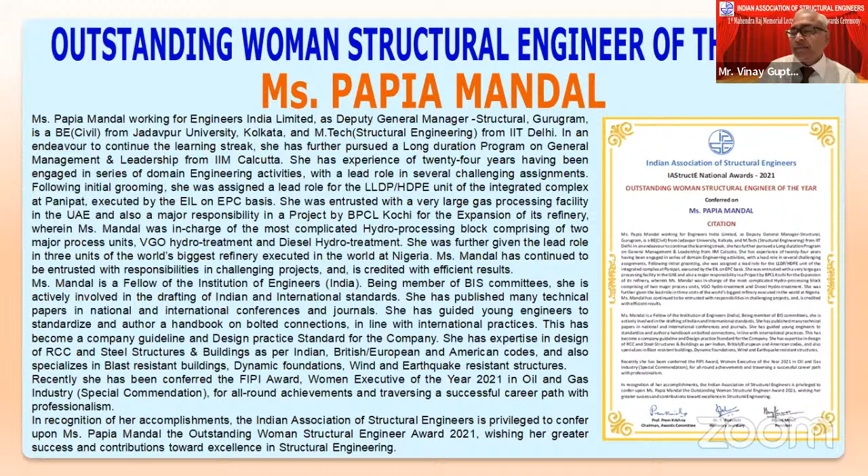Congratulations, Ms. Papia Mandal, for winning Outstanding Women Structural Engineer of the Year Award. I hope you will continue good work and also be connected with IAStructE and its activities, so that the entire structural engineering fraternity can benefit from your expertise and experience. I am very pleased to present you this award.

Thank you, Mr. Gupta and Mr. Mittal. Good evening to all the eminent personalities present here, ladies and gentlemen. I feel extremely honored to be recognized as the Outstanding Women Structural Engineer for the year 2021 by the Indian Association of Structural Engineers. I am honestly grateful to the esteemed jury members of the association for this recognition, as I am confident every other nominee for this award was as capable, if not more, to win it.

I would also like to congratulate all the awardees of today's evening. In my professional journey of 24 years in the hydrocarbon industry, I was associated with various domestic and international projects. Some of them were not only prestigious for the company, but also of national and international importance. Upgrading the knowledge base and sustaining the enthusiasm has always remained core to this exciting, rewarding, and productive journey.

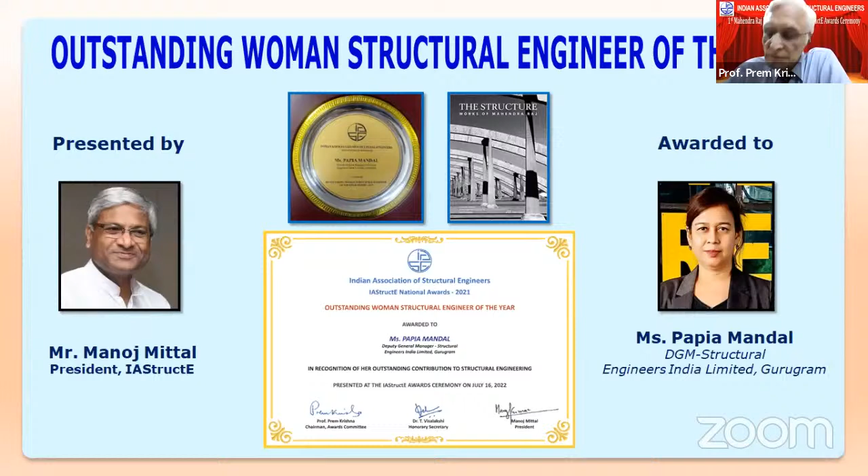I now have the pleasure of announcing the next category of award, which is for the promising young structural engineer. This award goes to a scientist at CBRI Roorkee, Dr. Devadatta Ghosh. May I request Dr. Shilpa Paul to kindly read the citation.

It's a pleasure reading the citation for the promising young structural engineer of the year, Dr. Devadatta Ghosh. Born in April 1989, Dr. Devadatta Ghosh obtained his BTech civil degree from Jalpaiguri Government Engineering College in 2010, his Master's MTech in Engineering of Infrastructure and Disaster Mitigation from the Academy of Scientific and Innovative Research in 2013, and PhD from IIT Delhi in 2020, excelling in his academic work throughout.

Dr. Ghosh started his career as a scientist at CSIR CBRI Roorkee in 2011, and he's presently serving at CSIR CBRI as senior scientist and group leader of data science and special structures. The major contribution of Dr. Ghosh is in the field of structural engineering, especially the development of non-destructive evaluation techniques for civil structures using ultrasound, thermal, and radar waves for assessment of defects in concrete structures, including corrosion-induced damage.